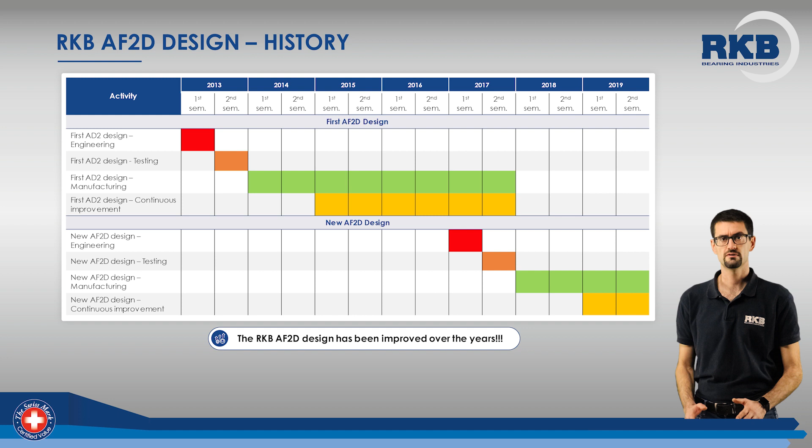In today's presentation, I'm going to show you the main features of our 4-row cylindrical roller bearings, AF2D class, which are mainly used in rolling mill stands. As you can see, the AF2D design dates back to 2013, and after many improvements and optimizations, it has now achieved a very high level of reliability. To obtain these results, our departments of R&D, engineering, and production have been working shoulder to shoulder for years.

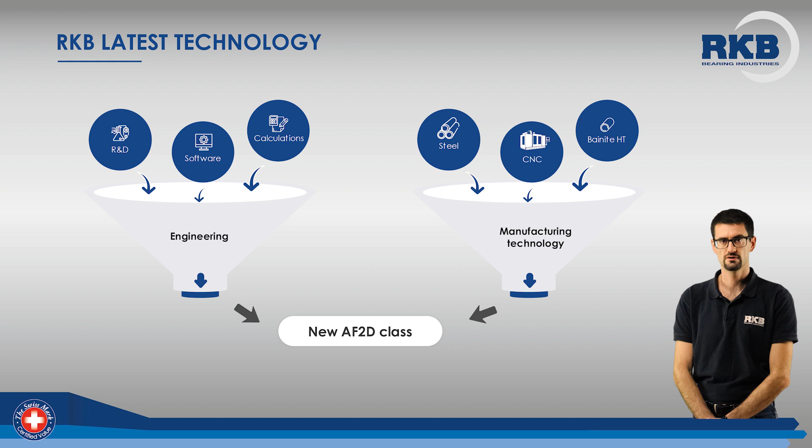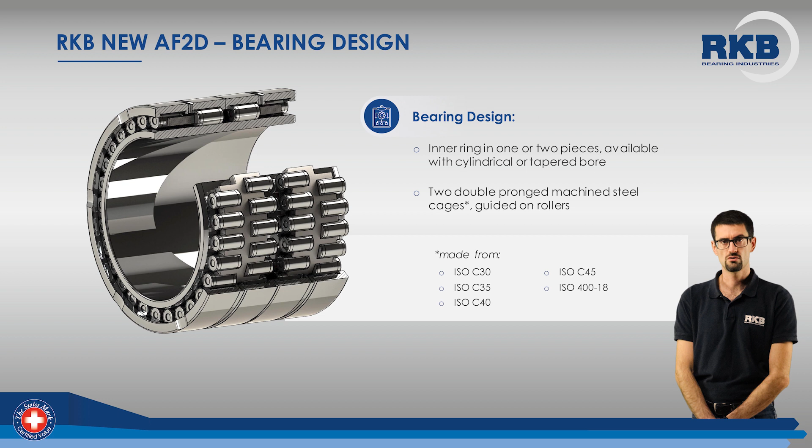The AF2D multi-roll bearings are available in different versions to meet our customers' needs. The inner ring comes in 1 or 2 pieces and can be provided with cylindrical or tapered bore, while the 2 double-pronged machined steel cages, guided on rollers, can be made from 5 different materials. The default design of AF2D includes the first outer ring, where the first cage roller assembly is mounted, the inner ring in 1 or 2 pieces, and the second outer ring with the second cage roller assembly.

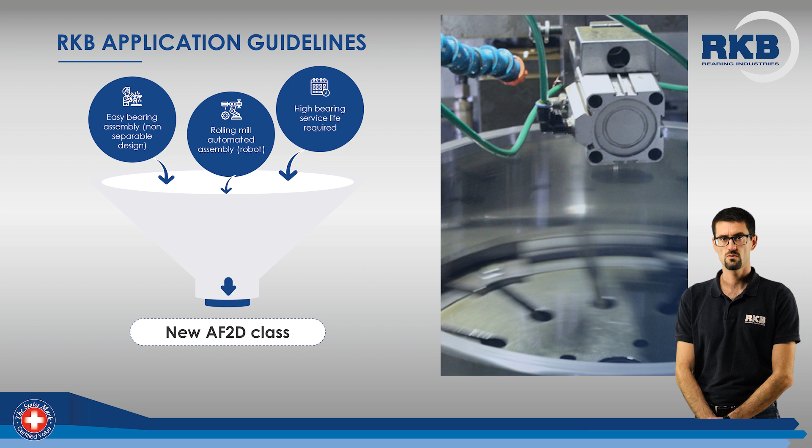We highly recommend using AF2D class bearings mainly in 3 cases. First, when you need an easy installation of the bearing and the separable inner ring can help you out. Second, if the assembly of the rolling stand relies on automated devices for roll changing. Third, when a long bearing life is required. Here are a couple of examples of applications where our AF2D bearings were mounted.

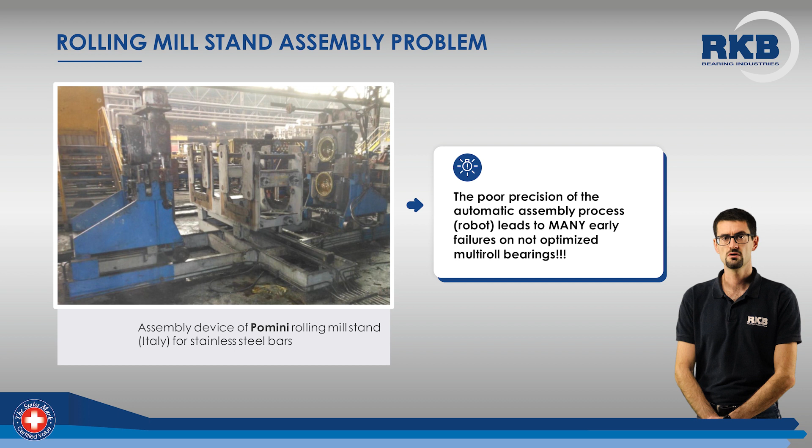As already mentioned, the AF2D bearings are very often installed with the help of robots. This kind of installation is characterized by lack of precision, which is very often the cause of premature bearing failure. Here you can see how a robot for roll changing works. The bearing outer assembly, mounted in the chock, moves axially, from left to right, toward the roll. The bearing inner ring is fitted on the roll. Theoretically, this process seems to be trouble-free, since there is enough bearing residual radial internal clearance.

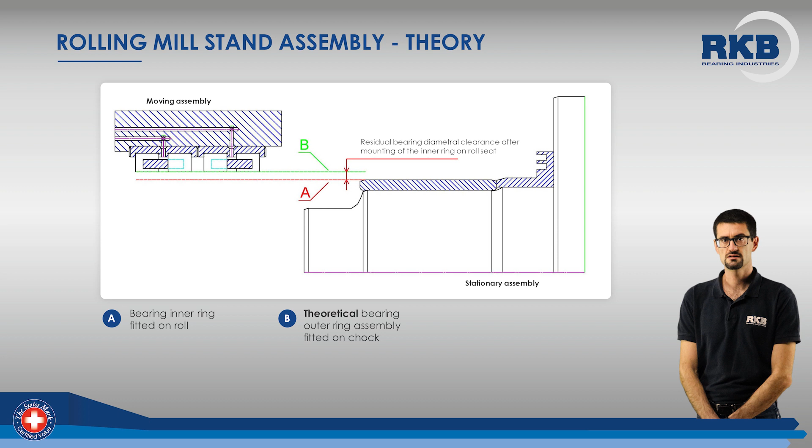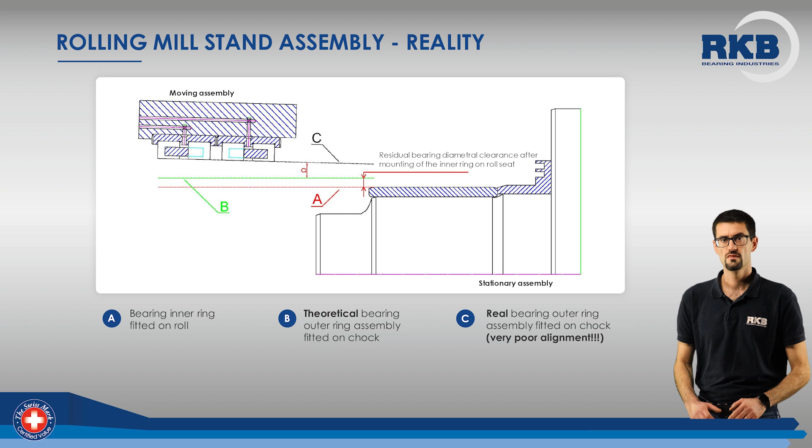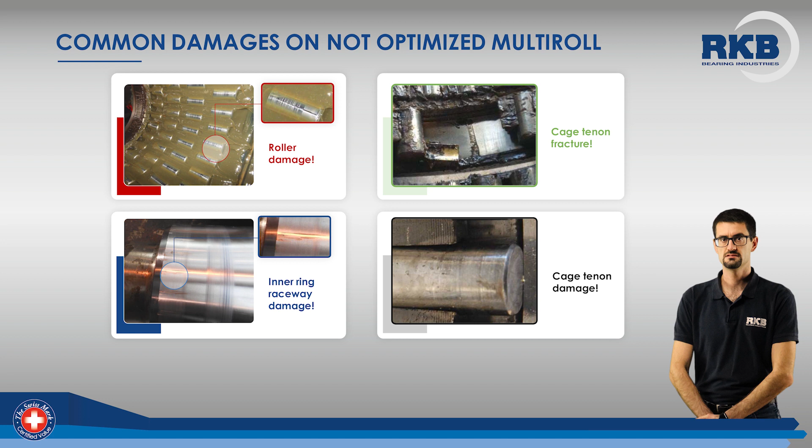However, this is how the robot works in reality. The assembly shows very evident errors of alignment and offset due to the poor accuracy of the robot. This generates impacts or interference between the parts while assembling. The most common damages resulting from this kind of robot-assisted assembly affect rollers, cage tenons, and the inner ring raceway, as it is evident from these pictures.

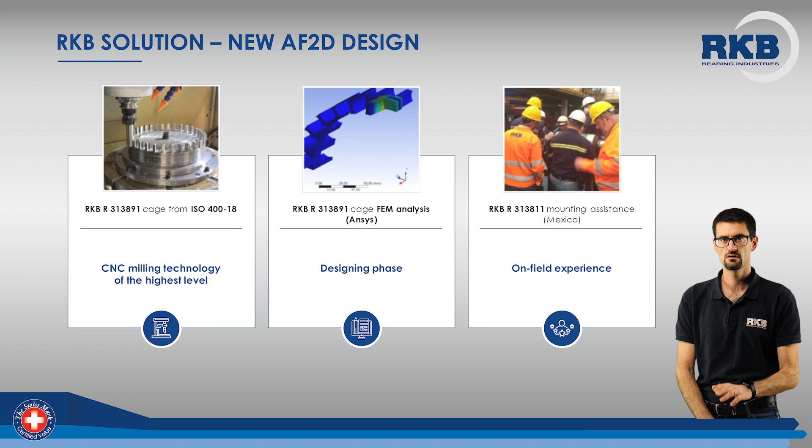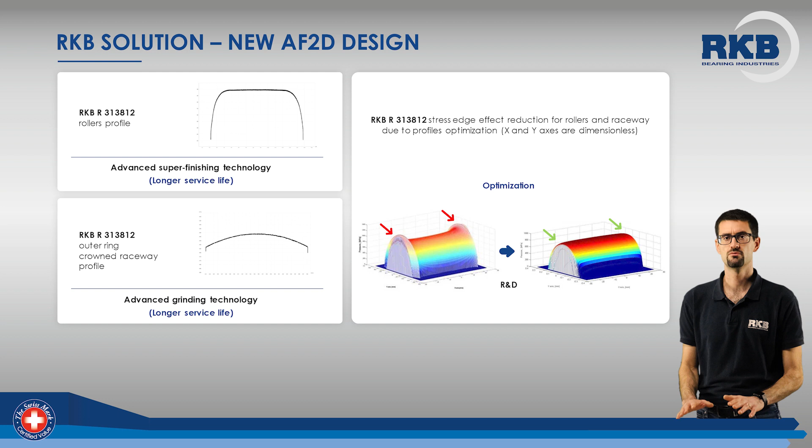To eliminate all these troubles, in 2013, RKB introduced the AF2D class bearings, which put together all the best findings in terms of manufacturing technology, design, and on-field experience. Let's start from the manufacturing technology, which involves 3 main areas, the first of which is bearing microgeometry. The top-level fine grinding and super finishing of the rolling surfaces of ring raceways and rollers results in a remarkable improvement of the stress edge effect with a pressure peak reduction.

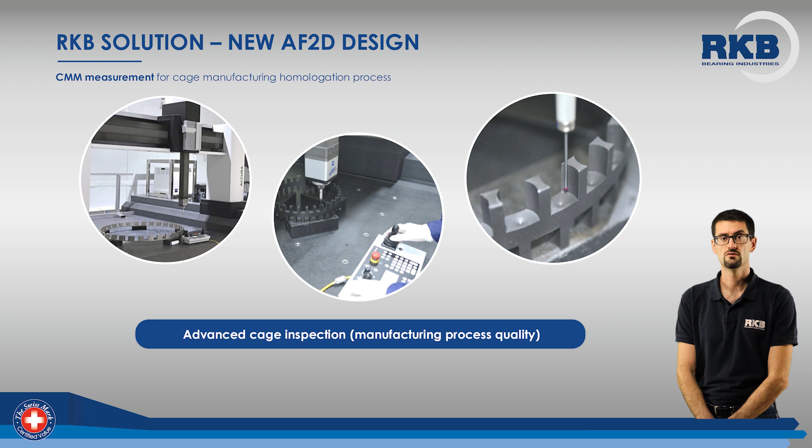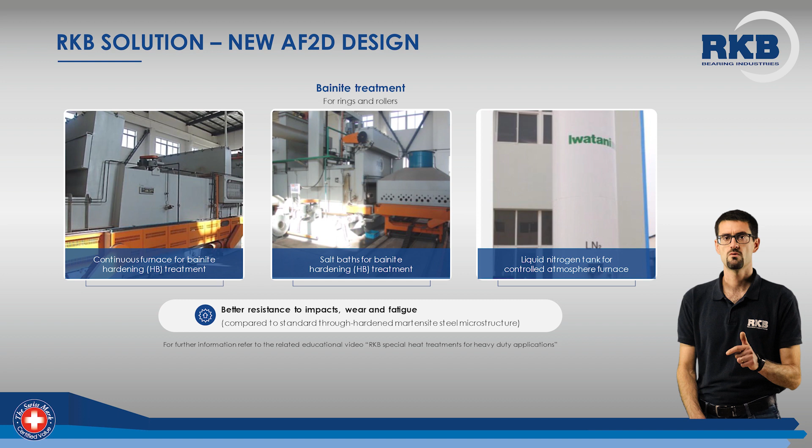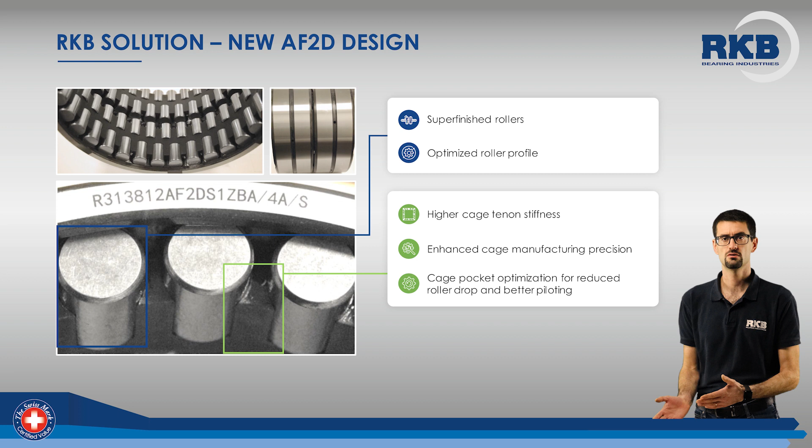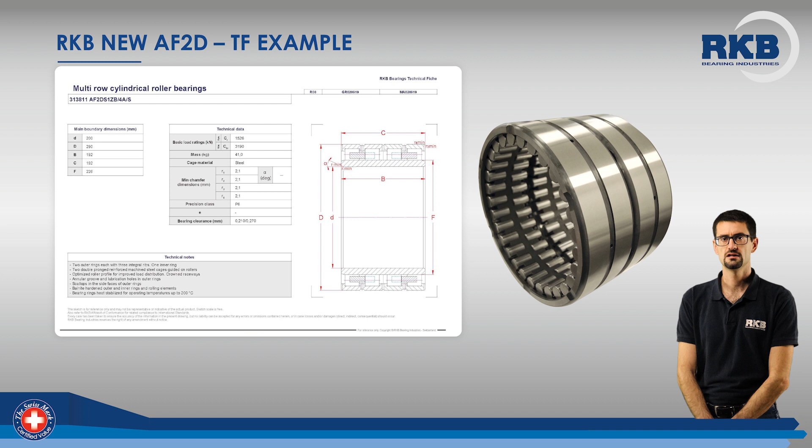This is an example of the datasheet coming with all RKB AF2D bearings. We call it Bearing Technical Fiche, and it provides the main technical details of the product. Over time, the RKB AF2D design has become a standard for many steel rolling mill manufacturers. Thanks to a remarkable increase in bearing life and a reduction in bearing assembly failures, the use of AF2D bearings allows for a sharp drop in the total cost of ownership.

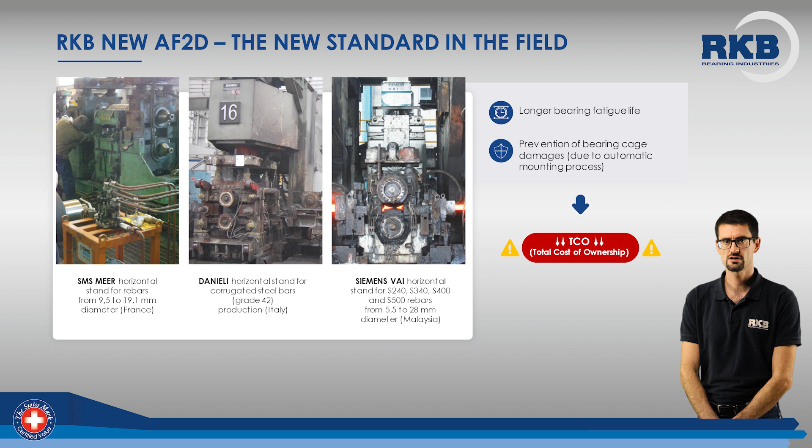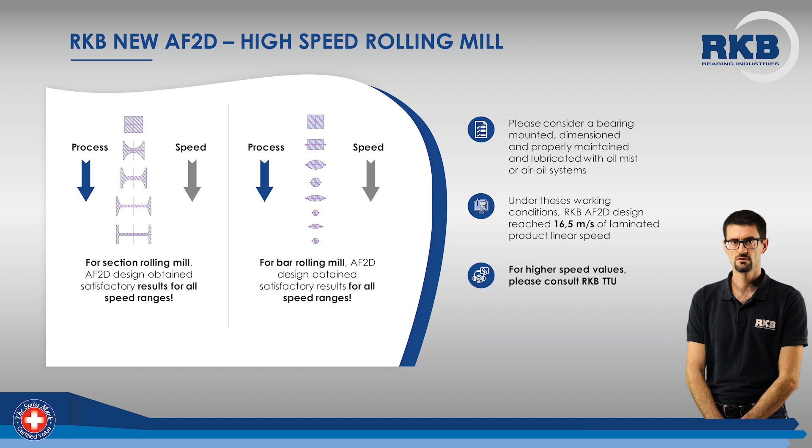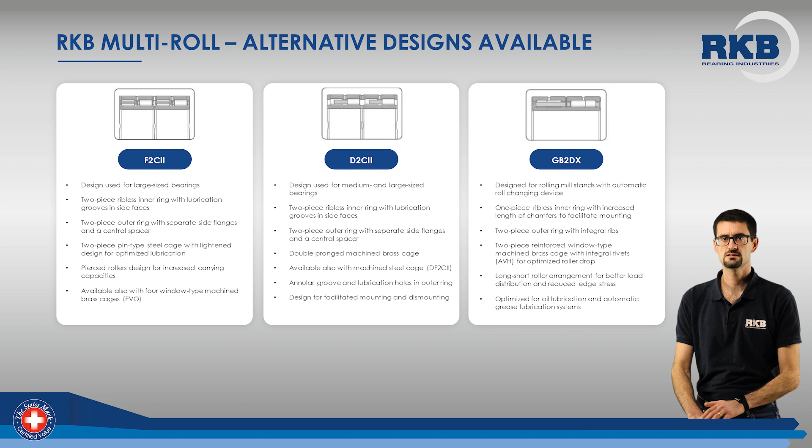In addition, the AF2D bearings reported excellent results also in the high-speed rolling mills, both section and rod. With an adequate lubrication system and a correct assembly of the bearing, linear speeds of 16.5 meters per second of the rolled product were even reached. As you can see, AF2D is not the only design available for multi-row cylindrical roller bearings. Each of the above designs is studied to meet specific application requirements.

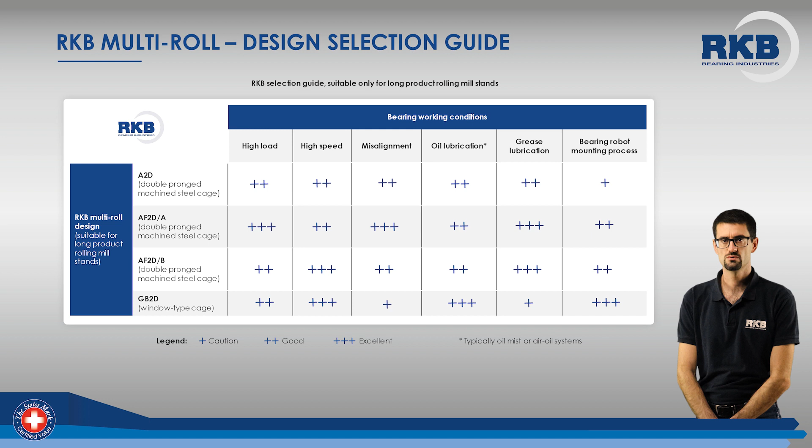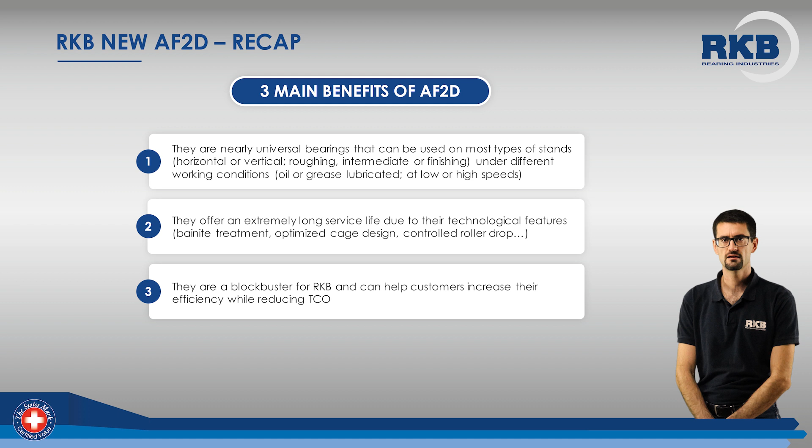This table is an excerpt of our selection guide for multi-roll bearings that shows the pros and cons of every design and version. In conclusion, here are the three main benefits of AF2D. Firstly, they are nearly universal bearings that can be used on most types of stands under different working conditions. Secondly, they offer an extremely long service life due to their technological features. And finally, they are a blockbuster for RKB and can help customers increase their efficiency while reducing TCO.